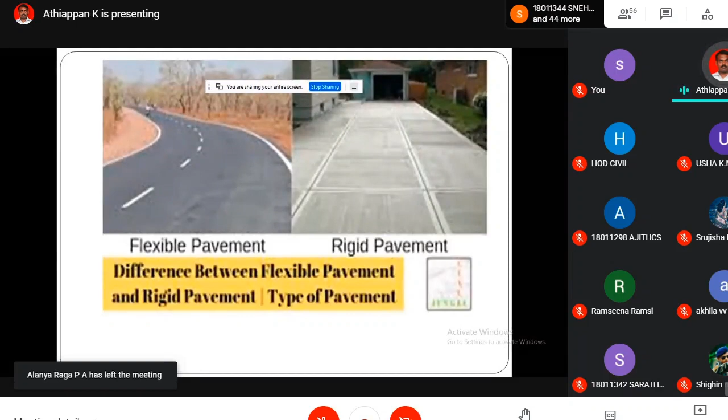Now, as far as loading is concerned, in flexible pavement the load transfer mechanism is from grain to grain - from one soil particle to another soil particle, the load will distribute. Whereas in rigid pavement, it acts as a slab or rigid plate, like a concrete slab. So please understand the components.

First you should have an idea about the components. That is the subgrade. In flexible pavement, the bottommost layer is subgrade, then we have the subbase course, base course, and surface course. Whereas in rigid pavement, here also we have the subgrade, then subbase course, then base course, and surface course.

You should have this basic knowledge of the components of the pavement.

Just like a building has substructures and superstructures such as beams, columns, and slabs, the pavement also has different layers. You should not think that the blacktop portion or the concrete surface we see is the only pavement structure - it has so many layers like buildings, the layers that I have discussed here.

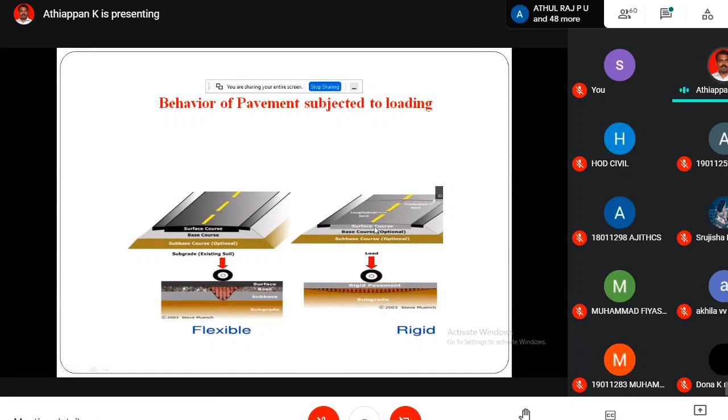You may ask about the comparison of ordinary concrete and pavement quality concrete. As far as rigid pavement is concerned, the topmost layer we are laying is the surface course, which is a concrete layer, a mixture of coarse aggregate, fine aggregate, binder content and water.

This is the components of the material we use in concrete. We know that concrete is a mixture of coarse aggregate, fine aggregate, water and the binder content, that is cement. Nowadays we are using geopolymer as a binder content in developing countries.

You may ask, what is the difference between ordinary building concrete and road concrete, that is the concrete used in the construction of pavement? Ordinary concrete is nothing but a brittle material. It is weak in tension, strong in compression.

We all know this, so in order to overcome the less tensile strength, we are introducing steel reinforcement. With the presence of steel reinforcement, the concrete can withstand the tensile stress or flexural strength and the compressive strength. This is the main thing.

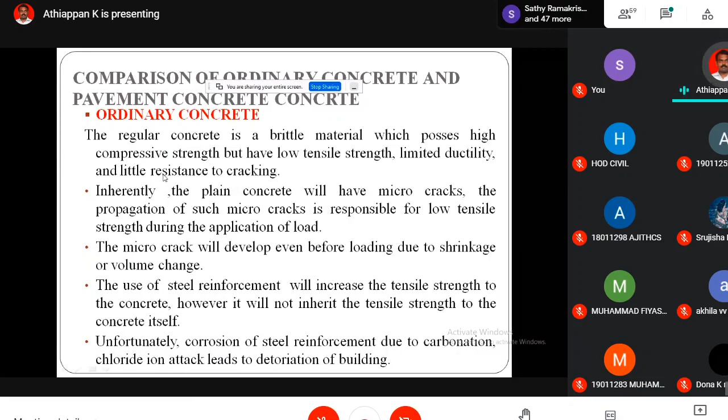In order to avoid corrosion of the steel reinforcement provided in ordinary concrete, we are providing a thick concrete cover, 20 mm, 40 mm, depending upon the exposure condition of the structure. This is the general detail about the ordinary concrete used in buildings.

The broad classification depending upon its parameters is that in ordinary concrete we need two parameters, that is compression as well as flexural strength. The main important factor required is compressive stress; it should be able to withstand the compressive stress and the flexural strength.

So normally when a beam is loaded, what will happen? The beam is subjected to bending, it is subjected to shear, it is subjected to compression and torsion.

So in order to withstand that load, the concrete should have enough strength, some M20 grade, that is 20 Newton per mm square after 28 days of curing. So flexural strength, depending upon the flexural stress created due to the loading condition and the span of the beam, that flexural strength will be recorded. So depending upon that, we will provide the reinforcement.

So this is the general requirement of the ordinary concrete which is used in building construction. The concrete should possess a high compressive strength as well as flexural strength. So these two parameters are important factors.

Whereas in case of pavement quality concrete, that is the concrete used for construction of road pavements, it should require compressive strength, which is also very important. But when compared to compressive strength, the other parameter is very important, that is the flexural strength. What is flexural strength? It is resistance to bending, so that strength we call flexural strength.

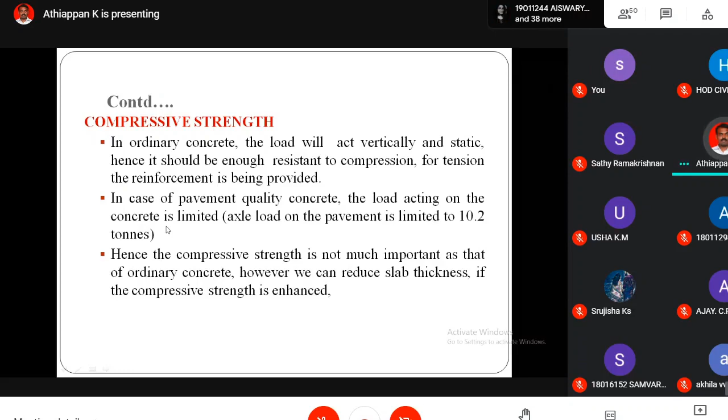Yes madam, so normally, as the load carrying capacity of the vehicle increases, we will automatically increase the axles, like tandem axle, tridem axle. For your understanding, for every 10.2 ton increase in vehicle load, they will add one axle. We have standards like tandem axle and tridem axle depending upon the capacity of the vehicle. Anyhow, the load distributed at the point of contact between two wheels on a single axle will not exceed 10.2 ton.

Next, flexural strength. As the pavement is a rigid plate, when a wheel load is moving on the top surface, the plate will tend to bend. The concrete surface, the slabs will tend to bend. Because of this, the concrete used in the construction of the road should have enough resistance to bending action. So flexural resistance is very important.

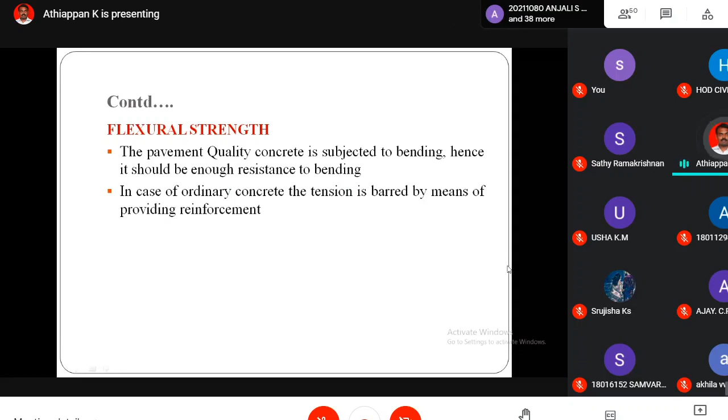Next one is energy absorption. As I told you, according to Newton's third law, for every action there is an equal and opposite reaction. So when a load is put on the road surface, it will be reflected to the vehicle. If it is reflecting completely, then the vehicle will get damaged soon and we will feel discomfort.

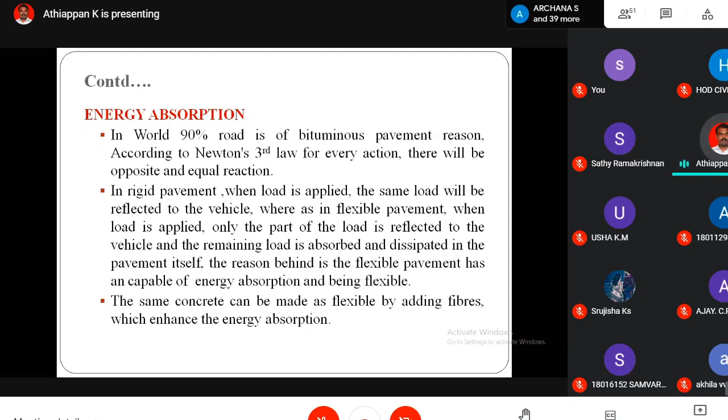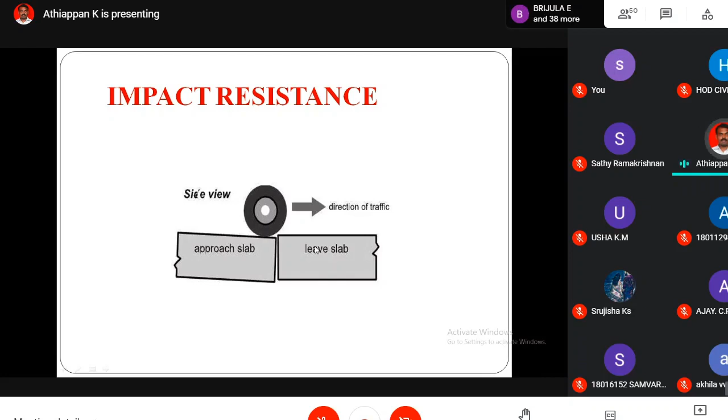So in order to avoid such conditions, the pavement should have good energy absorption and impact resistance. In order to accommodate expansion and contraction, we have to provide joints. As a result, when a wheel moves from one slab to another, impact action takes place at the edge of the slab. So the concrete used for pavement construction should have enough resistance to withstand the impact load.

Next, fatigue resistance. What is fatigue resistance? Normally in an ordinary building, we fix the load, say 1000 kilonewton, 2000 kilonewton, 20 or 80 kilonewton, whatever it may be, and based upon that we provide the section and reinforcement. As far as road pavement is concerned, the axle load is limited to 10.2 ton. Because of the repeated passing of this 10.2 ton axle, the pavement will fail. That is fatigue failure, nothing but failure due to repeated application of load.

I will give one example. You take a coconut with shell, and you hit it with a 5 mm rod. Whether the coconut shell will break or not, how many number of hits is needed to break that shell? Anyone?

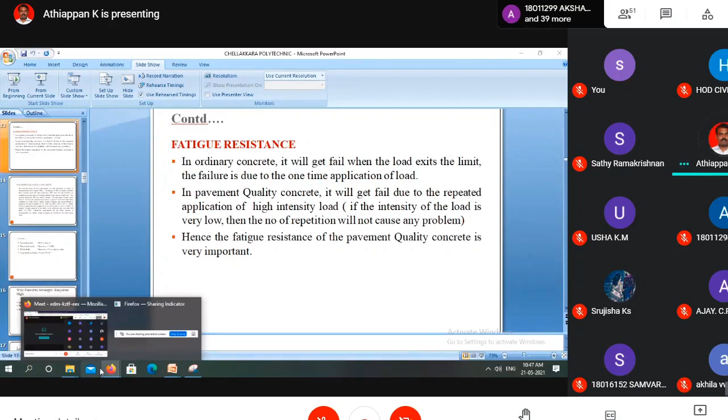Dear students, you take a coconut with a shell. If you are hitting with a 10 mm rod, how many number of strikes is needed approximately to break the shell of the coconut? Please, anyone?

Three or four is enough. With a 10 mm rod, you can break the shell with 3 or 4 hits.

Okay, then I will reduce the size of the rod further. For example, you are given only a 2 mm steel rod, and asked to hit the coconut with shell to remove the shell. How many number of blows does it require? I am telling only a 2 mm rod, which you can assume is like a needle. How many number of blows does it require? Please tell me. Please be interactive, then only I can keep the class alive.

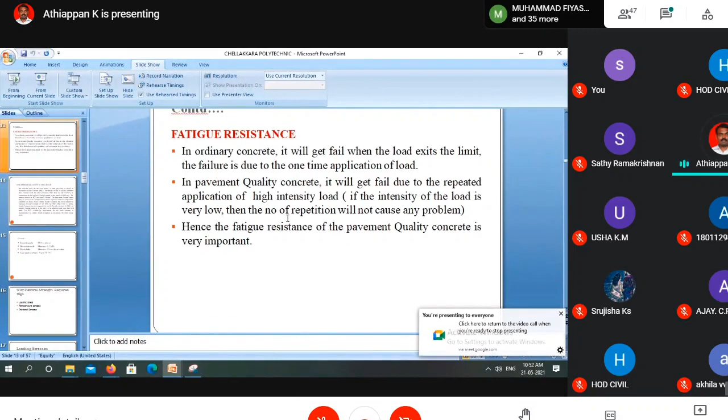So that is fatigue failure. The concrete we are using should be able to withstand fatigue resistance. Now we will come to pavement quality concrete.

So here we have many questions regarding pavement quality concrete. As far as the concrete used for construction of the road pavement is concerned, they use the minimum grade of M40 concrete. Why are they using M40 grade, and not M20 or M30? As per the IRC code, IRC 15 of 2011, we have the minimum grade of concrete recommended for construction of the pavement as M40 grade.

What would be the reason we are not using lower grade concretes? Do you have any idea? I will tell you, as I already mentioned. The concrete is subject to so much flexural stress and tensile stress because of the bending action due to the wheel load, and due to temperature stress, the slab will tend to warp.

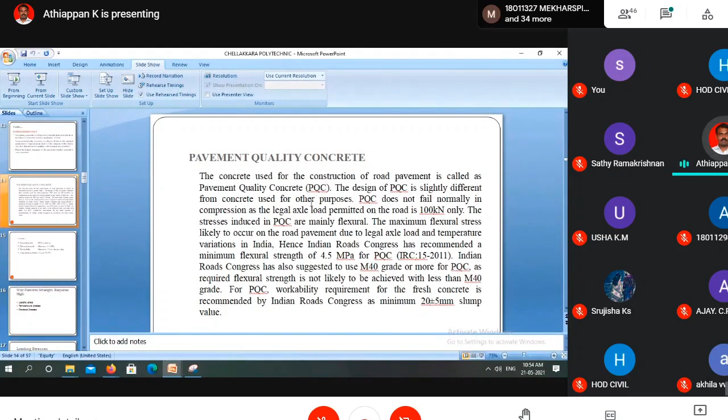The slab will tend to warp. Let me show you. This is the loading condition. The wheel may be in this position, or this position, or this position. Because of this load, the slab will tend to bend.

Due to temperature, in the daytime the top face of the pavement has very high temperature while the lower face has less temperature. Because of this, the top portion expands and the bottom portion contracts, causing bottom-up warping. During the night time, the top face temperature becomes very low compared to the bottom of the slab, so as a result, the slab will warp in the opposite manner.

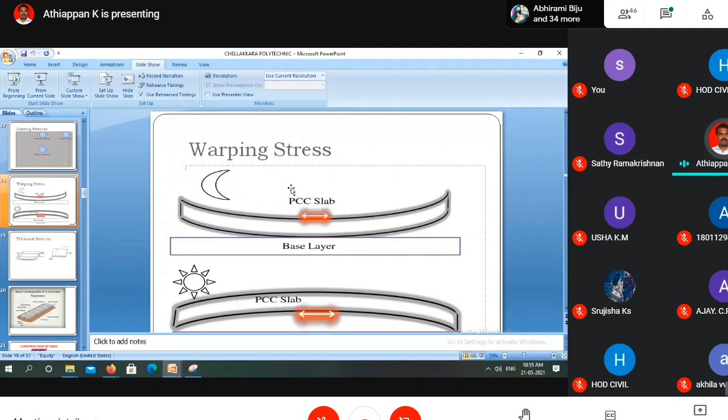Because of this, we get warping stress, and because of the loading, the slab will tend to bend. These stresses mean the concrete slab has to withstand this bending action, so for this we need a minimum grade of M40 concrete. Why do we say M40, when only flexural strength is needed as the slab is subject to bending? But we are saying M40 grade concrete is needed, meaning the compressive strength should also be high.

Why are you asking this question? The reason is that even though concrete is strong in compression and weak in tension, it also has some flexural strength. So what is the tensile strength?

Tensile stress in concrete is 0.7 square root of FCK. So the flexural strength of concrete, or tensile strength, is equal to 0.7 square root of FCK, where FCK means compressive strength of the concrete. So if you put FCK as 40, what is the flexural strength? Please tell me, as per IS 456:2000 code.

The flexural strength of plain concrete is equal to 0.7 square root of FCK. FCK means characteristic compressive strength of the concrete. So you put FCK equal to 40. What is the flexural strength, you tell?

So according to IS 456, plain cement concrete also will have flexural strength. The formula is 0.7 square root of FCK. So in place of FCK, you put 40. You are using M40 grade. IRC has recommended that only concrete of grade greater than or equal to M40 should be used, and I will tell you the reason.

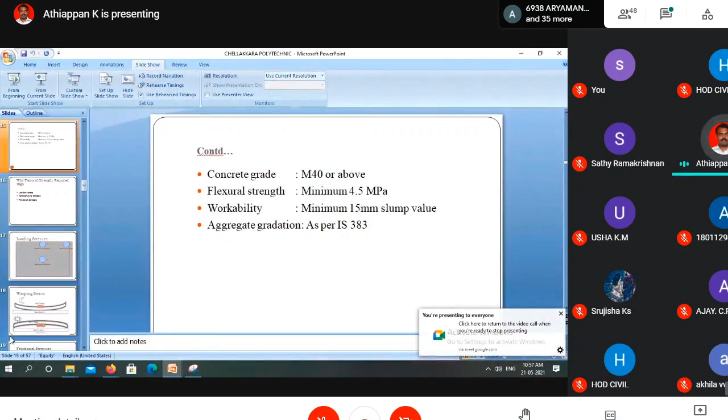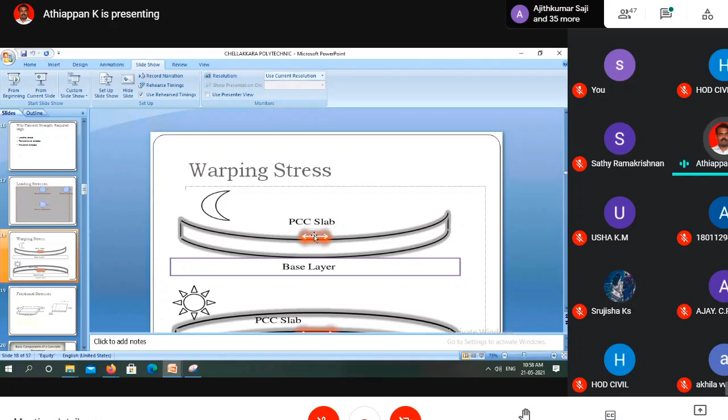The reason is that, because of the bending action due to wheel load and due to temperature stress, bending action takes place. So the total flexural stress created on the slab will be less than 4.5 Newton per mm square, that is 4.5 megapascal.

So if you are providing M40 grade concrete, then the plain cement concrete itself can withstand a flexural strength of 4.5 megapascal. So by using M40 grade concrete, even plain cement concrete satisfies the required minimum flexural strength of 4.5 Newton per mm square.

This is the maximum stress induced on the pavement surface due to wheel load and temperature stresses from warping or frictional stress. That is the reason they use M40 grade, as we are not using any reinforcement to enhance the flexural strength of the concrete. So we are only using plain cement concrete, always keep this in mind.

We are not providing reinforcement to enhance flexural strength. Just from the plain cement concrete itself, we are having some flexural strength, which will withstand the bending action due to warping or wheel load. That is the reason we recommend M40 grade concrete, so that we can achieve the required flexural strength of 4.5 Newton per mm square.

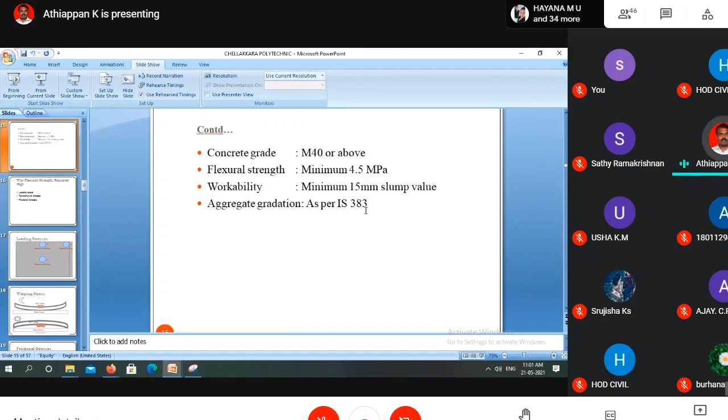Another stress created on the rigid pavement is that the whole slab is resting on some surface. If the slab is expanding, what will happen? At the contact of the slab and the surface, an opposite force, the frictional resistance, will be created in the opposite direction. Because of this, stress will be created at the bottom of the slab.

That stress is called frictional stress. Here the frictional stress is compressive. Whereas when the slab is contracting, when the temperature is very low, it will lead to the formation of frictional stress at the bottom face only, that is at the point of contact of the surface and the concrete slab.

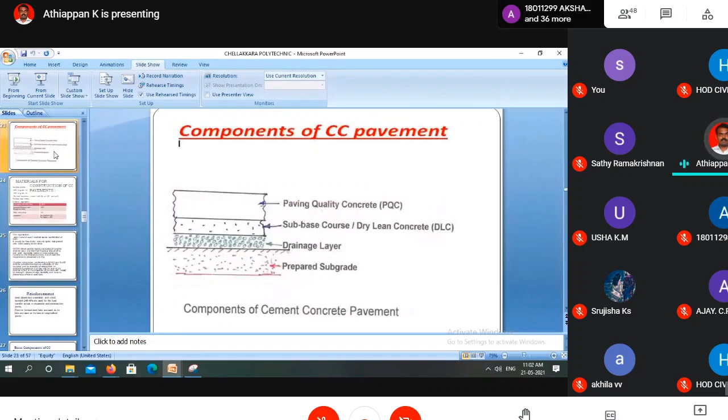Now we will move on to the construction of the rigid pavement. Before that, I will explain the components of the CC pavement, and in the rigid pavement itself, where the rigid pavement is needed.

In places of heavy rainfall, we have the option of flexible pavement, which has less construction cost. Then why should we go for rigid pavement? This rigid pavement is applicable in places having heavy rainfall, poor soil condition, poor drainage, extreme climate conditions, or a combination of these conditions. In such cases we have to go for rigid pavement construction.

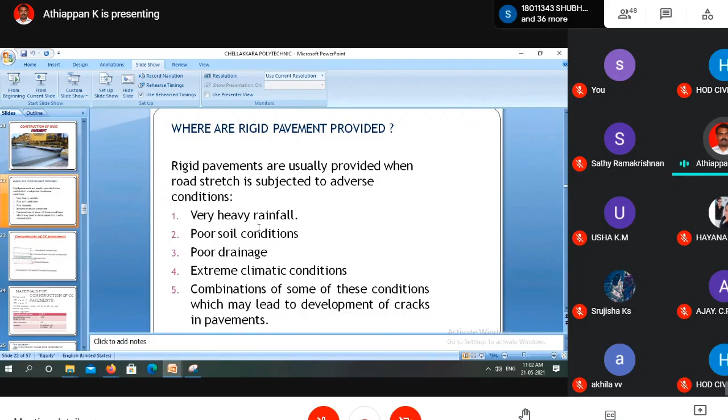The major component is the subgrade. This is the bottommost layer of the pavement. As in the flexible pavement, the madam will explain about this subgrade. So here also, the bottommost layer is the subgrade only.

If the subgrade layer has enough strength, then the top layer required is very less. If the subgrade strength is poor, then the layer constructed above the subgrade needs to be higher. So the subgrade is one important factor which determines the thickness of the overlying layer. This is the subgrade, the platform for the construction of the upper layers.

Sometimes it may be at the cutting portion, or sometimes it will come under the filling portion. Sometimes the natural ground level may be adopted as the subgrade. According to the new code, in flexible pavement the minimum CBR value required is 5%. If the CBR value is less than 5%, we have to remove the soil for a depth of 0.5 meter and bring borrowed soil having a high CBR value, say 8 or 10.

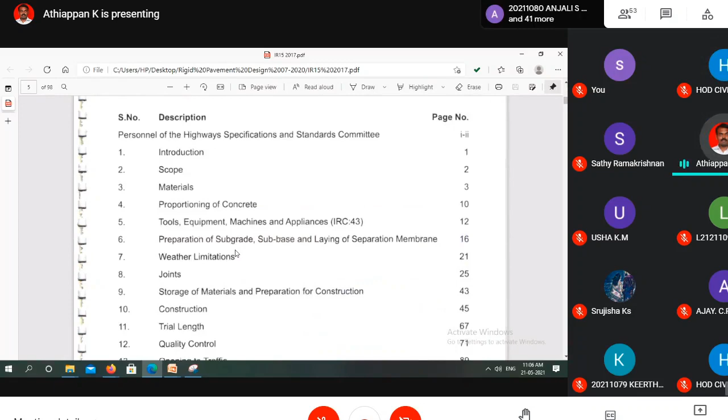Are you able to see the code, yes students? Are you able to see this code? Please students, reply through your voice. Yes sir. Okay, okay.

So for the construction of the pavement, we have to use... please understand, students, as you are studying the books. So please, as you are a UG student, nowadays you are following the books.

It is written by some faculties like me, or your HOD, or some other faculties or persons. As the technology is upgraded, it's only reflected in the codes. For example, if you follow the Khanna and Justo book, it is written 10 or 20 years back, so it may be outdated. For real-time application, each and every civil engineer in the field or any place will use only the current codes as reference.

Whether a design engineer or architect, whoever it may be, they will follow the standards as per the government procedure. So every year or every 5 years, they will modify the code. So please understand, students, you should follow the code if you are coming to real-time application. For a crisp knowledge and to understand things easier, we are following the books, your faculties are suggesting the books, but as far as real-time application, you have to follow only the code.

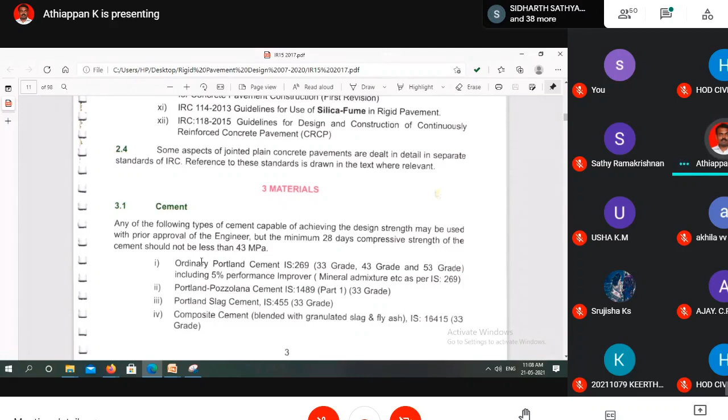We can use cement, that is ordinary Portland cement, 43 grade, 53 grade or 33 grade. Any of the cement can be used, but the concrete should attain the strength of M40 grade concrete. We can also use other cements like composite cement, Portland cement, and any other cement, with the inclusion of 5% of admixtures.

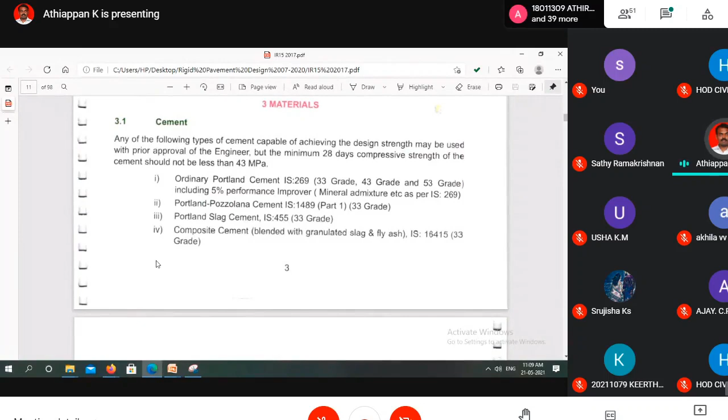This is the chemical admixture. Admixture means nothing but a chemical which is added with the concrete. For example, a concrete will be manufactured at one place and it has to come to the construction site of the pavement. In such case, you have to delay the setting time, so we will use retarders. Likewise, many chemicals we may need to use.

So you can see the code, that is IS 9103. In that they will provide the detail about the admixtures. Normally we will use initial setting time; to delay the setting time, we will use retarders, then air entraining agents. So many admixtures we are having, and those admixtures we will use, but that should not exceed greater than 2% of the cement. That is the main thing.

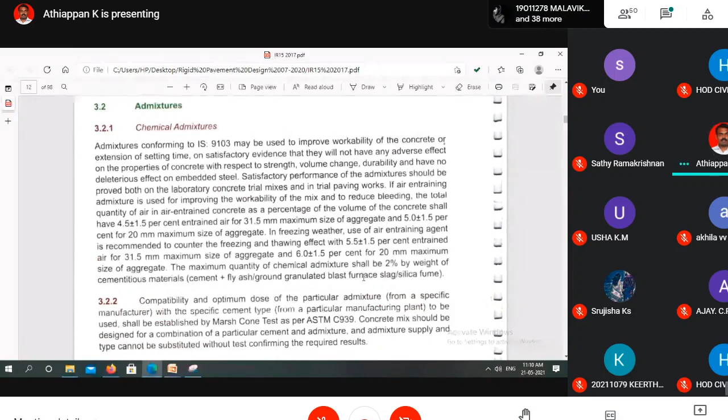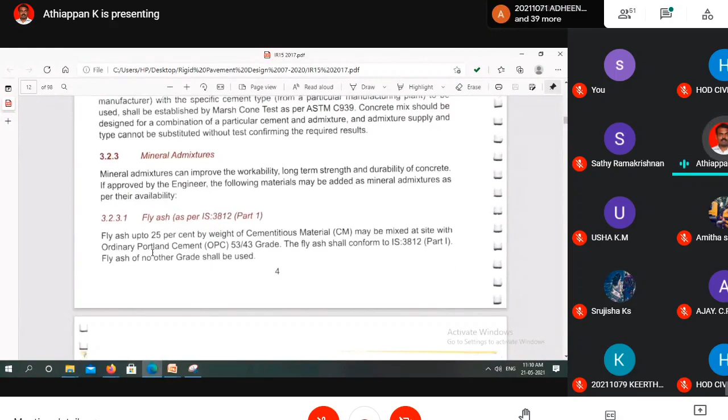The maximum size of aggregate used in the concrete is 31.5 mm. Fly ash can be used up to 25%. GGBS blast furnace slag can be replaced up to 50%. Silica fume can be replaced up to 10%.

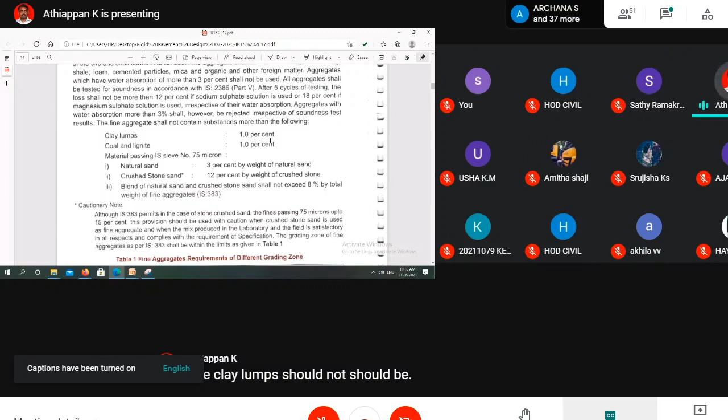Metakaolin, a type of clay content, can be added up to 700 to 900 square meters per kg. This is for the aggregate used in the construction of the concrete. Clay lumps should be less than 1%, and coal and lignite should be less than 1%.

For the 75 micron sieve passing, natural sand should not be greater than 3%. In case of crushed stone, it should not be greater than 12%. If using blended material, it should not exceed 8%.

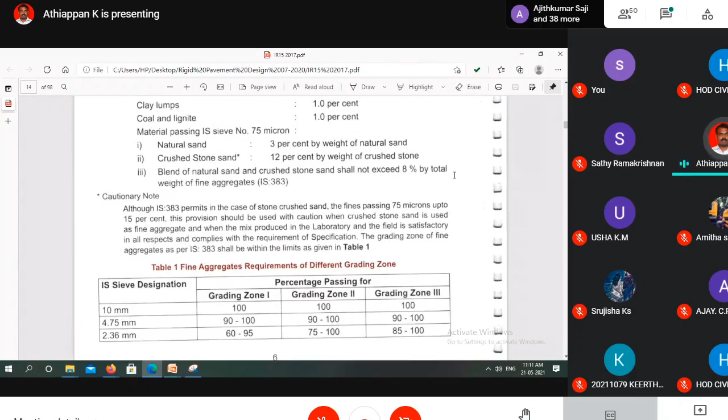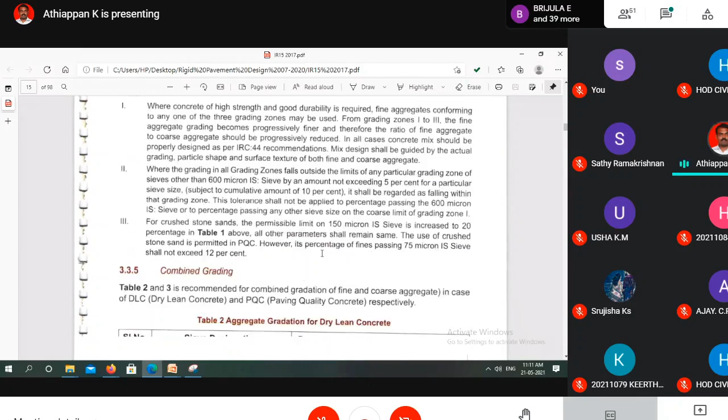This is the fine aggregate used for the concrete, and it should satisfy any one of these zones. This is the gradation particle size distribution requirement for construction of dry lean concrete. If using dry lean concrete, the aggregate should satisfy this requirement.

For particle size distribution, in the 26.5 mm sieve, it should pass 100%. Then in the 19 mm sieve, the particles should pass 75 to 95%. This is the requirement.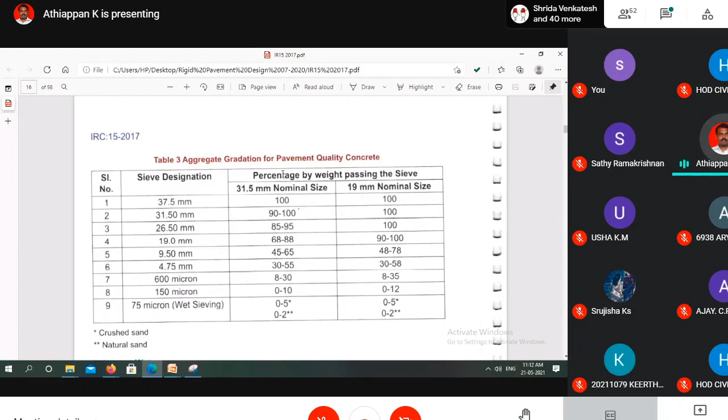The aggregate used should satisfy any one of these gradations, otherwise it cannot be used for pavement construction. Then water, dowel bar, all those things are explained here, along with filler and joint sealing requirements.

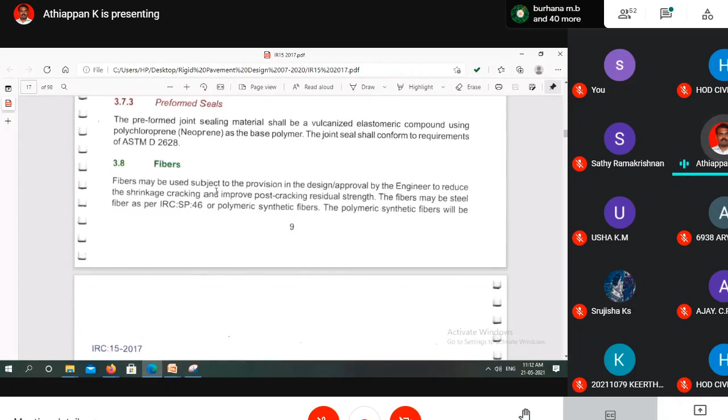Nowadays fibers are also used. Normally fibers of 8 to 300 micron are used, with length from 6 to 18 mm. Specific gravity and other properties are given.

Fibers are used because in extreme climatic conditions, like very hot temperatures followed by very cold temperatures, such as in Rajasthan, more shrinkage and expansion takes place, resulting in more warping stress. If these fibers are provided, they impart extra tensile force or flexural strength, so the pavement can last for a longer period.

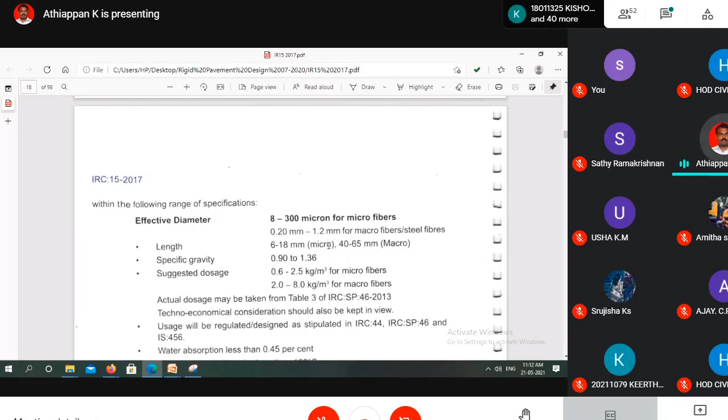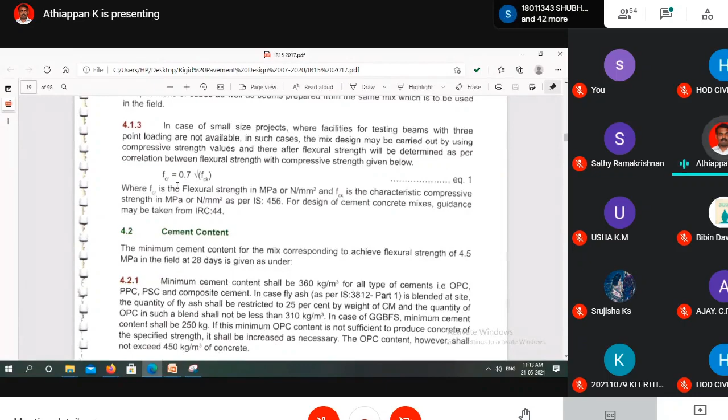As I told you, flexural strength equals 0.7 times the square root of FCK. The maximum cement content allowed is 450 kg; beyond 450 kg, cement should not be used.

The minimum cement content is 360 kg in case of OPC, PPC and PSC. In case of GGBS, the minimum cement content is 250 kg per cubic meter.

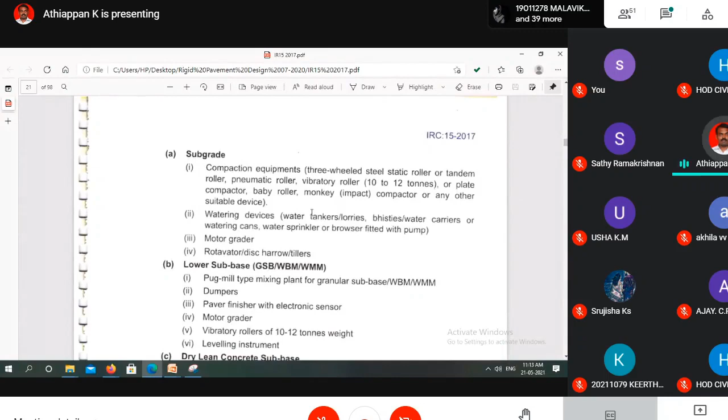For subgrade preparation, these are the equipments needed for construction of the pavement, including compacting equipment, water devices, water cans, motor grader, pug mill, and dumpers, which I will explain.

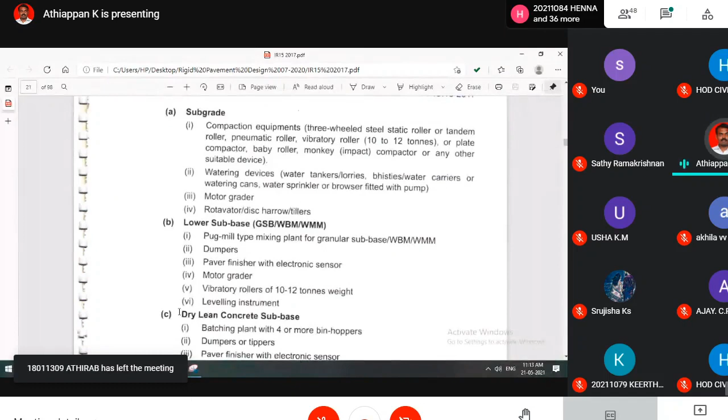This is the subgrade. In order to prepare this subgrade well, you have to loosen the soil. I will now explain how to construct it.

First, you have to loosen the soil, whether it is good soil, bad soil, or borrowed soil, whatever it may be. You take a sample and go to the laboratory, where you determine the density of the soil.

You have to increase the water content. Starting from the initial water content, you compact the soil without water content first and find out the density, then increase the water content by 2%, 4%, 6%, 8%, 10%, 12%, 14%, and so on.

As the water increases, the density also increases. At a particular point, the density falls down. The reason is that initially the water facilitates compaction, but beyond a certain limit, the water content will occupy the voids and reduce the density, leading to bleeding. So we have to find out the moisture content at which the density is maximum. That is called the maximum dry density.

For example, 2.16 gram per cc is obtained in the laboratory. So of that 2.16 gram per cc, you have to achieve a density of 98% in the field. Otherwise, with further application of the wheel load, when the vehicle moves, it will consolidate and compact further, and settlement will occur. This settlement will be reflected on the upper layers also.

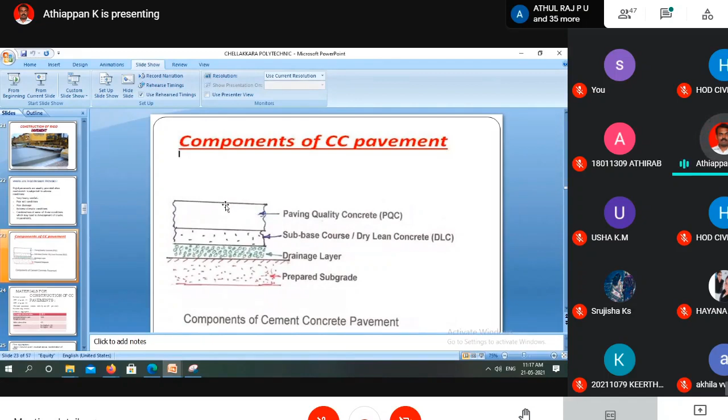So you may ask why we won't provide any joints in the subbase layer. We don't need to provide joints in the dry lean concrete because it is a 1:4:8 concrete with high voids. Those voids will accommodate the expansion and contraction. So you have to make this pavement quality layer, the PQC, as an independent layer.

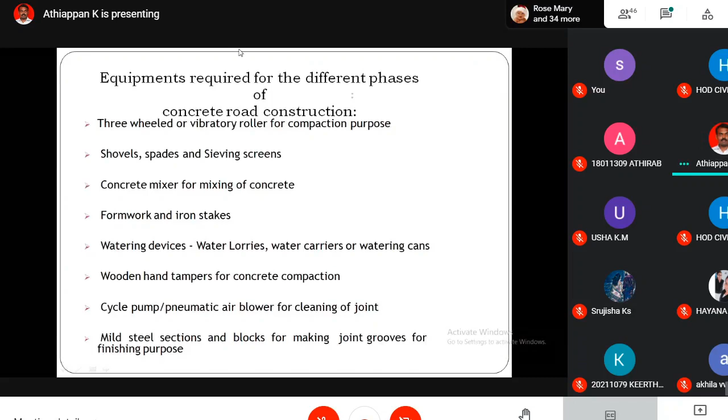Please see here, normally the slab is... this is the bottommost layer, subgrade, then this is a drainage layer, then this is the concrete pavement. In case the subgrade is poor, we have to provide dry lean concrete. The topmost layer we are constructing as a slab only. Normally the slab size should not exceed 4.5 meters.

For example, why are they laying it as 2 strips in the longitudinal direction? Suppose the pavement is 7 meters wide. I have already told you that the width or length of the slab should not exceed 4.5 meters. If you put 7 meters like this, it cannot accommodate the expansion and contraction, it will lead to cracking. So to avoid this, we divide this 7 meters into 3.5 meters and 3.5 meters, with the length maybe 4.5 meters. This joint we call the transverse joint or contraction joint. And the joints in the longitudinal direction we call...

So in this transverse joint itself we will have the expansion joint also. Don't confuse the contraction joint and the expansion joint, I will explain later. So this is longitudinal joint, this is transverse joint. In the transverse joint itself we have two types: one is contraction joint, another is expansion joint.

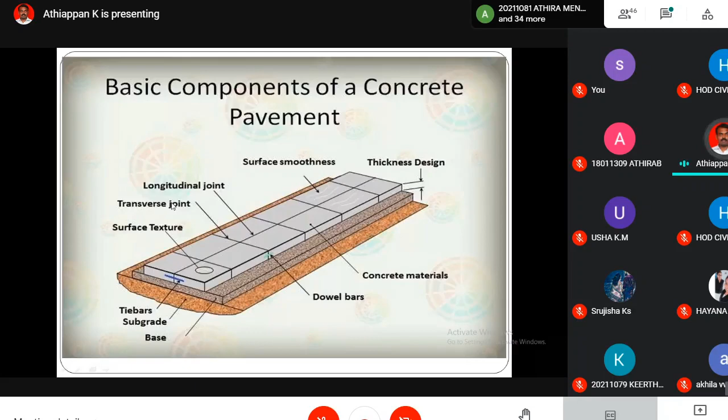So this is how you lay the pavement as a slab. In between the joints there will be a gap, that is the joint width, maybe 2 to 3 mm. This is the compacted layer of the subgrade, over which they provide the GSB, then over which they provide the dry lean concrete.

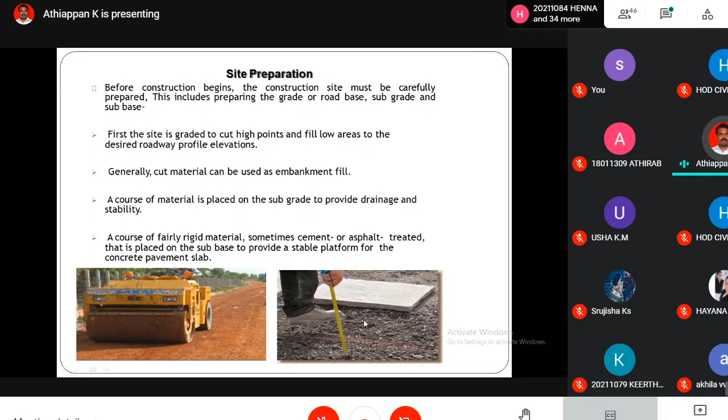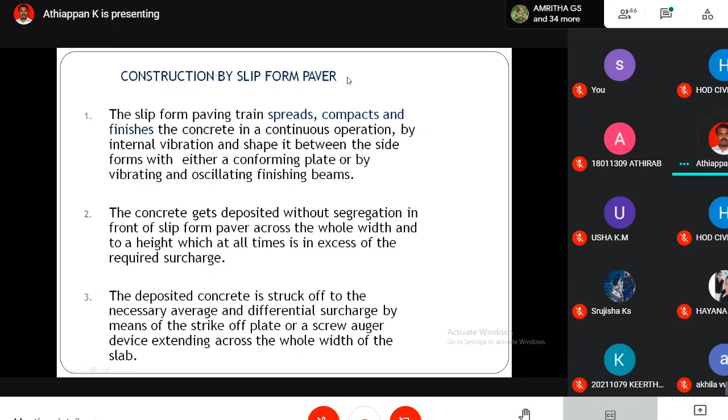So what we have to do is construct the pavement in two ways. We are constructing this rigid pavement by two methods: one is by means of slip form method, another is by means of fixed form method. I will explain that one by one, but before that, I will explain the joints.

So here, the expansion joint or contraction joint will be in this place, and this is the longitudinal joint. The function of this is that in the contraction joint and the expansion joint we provide the dowel bar. It will bear the load, keep the slab in the same level, and transfer the load between the slabs. That is the function of the dowel bar, to keep the slabs level.

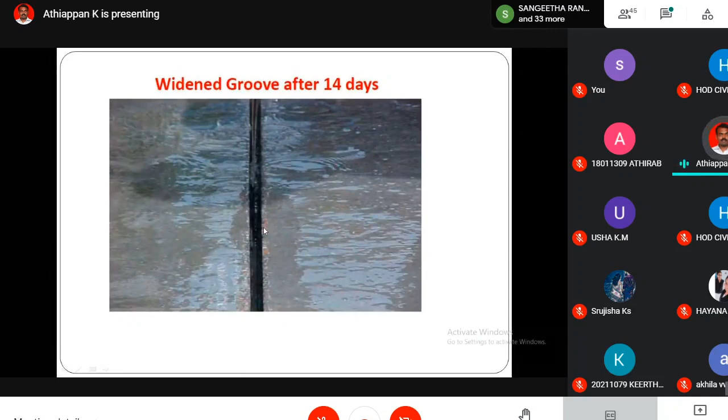So this is the finished, widened groove after 14 days for the final finish of the joint. So here, this is the contraction joint.

We provide the dowel bar at a distance of h by 2. On top we provide the rod, then a groove is cut out. In the groove we fill it with the filler and then seal it with sealant. So we call it the contraction joint. Nowadays we are using this type of joint only.

At the end of construction only we are providing the expansion joint. Please understand, student, at the end of construction only we provide the expansion joint. Otherwise, for every 4.5 meters we are providing only the contraction joint, that is enough. So this is contraction joint with the dowel bar, and in the tie bar also I will explain you.

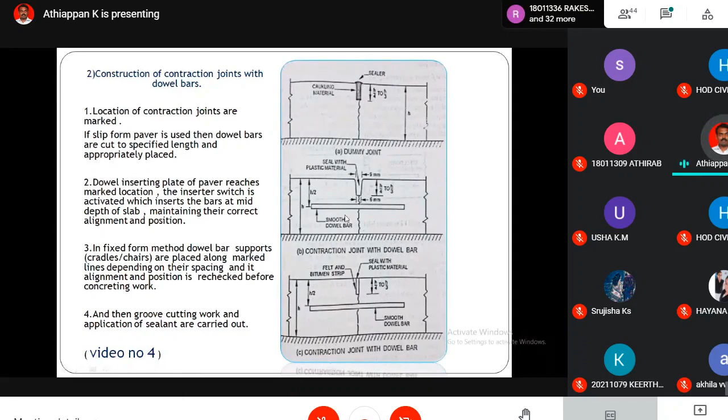So here, this is the expansion joint. At the end of construction, we finish it in such a way that this rod is fixed to the concrete, the other rod will be in this manner, for the next day's construction concrete. Here we use a plastic sheet, and there is an expansible gap so the rod can freely move in this direction. So when the slab is expanding, this rod will come here. That is called the dowel cap.

It will be around 7.5 centimeters, filled with compressible material. So when the slab expands, this will be compressing. When the slab contracts, the rod will come back to the original position. So on one end, the concrete slab can move over the rod.

Normally we use 25 mm diameter bar. The length of the dowel bar is 500 mm long, spaced at a distance of 250 mm center to center. But in design aspect it may change, so for general understanding I am saying this. Then the filler depth is around 25 mm, it may be plus or minus 3 mm.

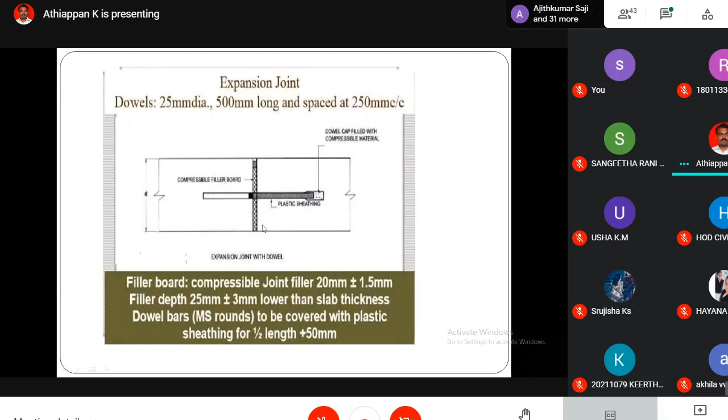So here this is the dowel bar, with dowel cap, and this is the expansion joint. At the end of the construction day, the next day they will start from here. What is the function of this dowel bar? If you are not providing it, the slab will settle down. As the wheel moves from one slab to another, this bar will bear the stress coming from the wheel, and another function is it will keep the slab in level.

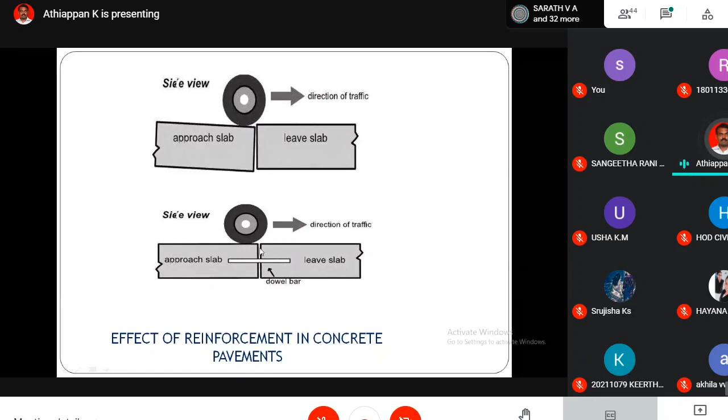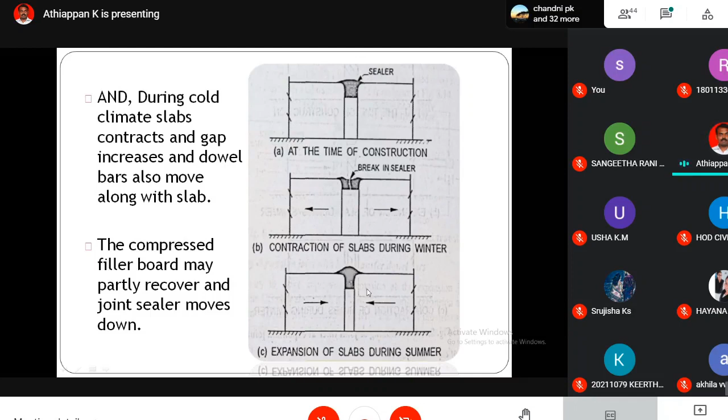See here, the sealer. At the time of construction, it will be like this. When the slab is expanding, the sealer will reorient itself, and when the slab is compressing due to expansion, the sealant will come to the top. So here it is filled by filler material.

Then after construction of the pavement, in the fresh concrete time itself, you have to scrub it with the wire brush to have enough texture. There are two types of construction: slip form construction, and fixed construction. So by this we can able to see.

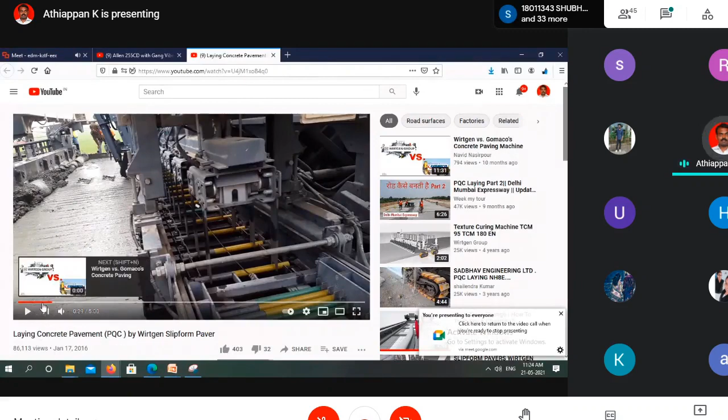See here, this is the DLC layer over which the sheet will be placed. I have already told you now.

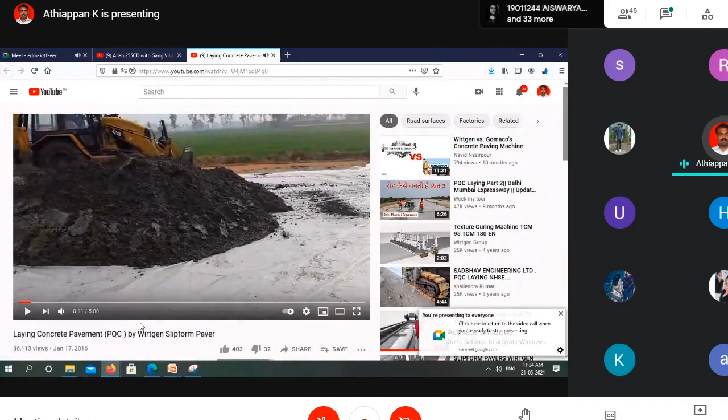See here, I have told you that this is over the dry lean concrete. We will provide the polythene sheet, that is the geosynthetic sheet. What is the reason? The concrete slab constructed over the sheet is free to move over the surface; otherwise, frictional stress will be created at the bottom of the concrete, and it will create some problem or create cracks. So in order to avoid this, we are providing these sheets.

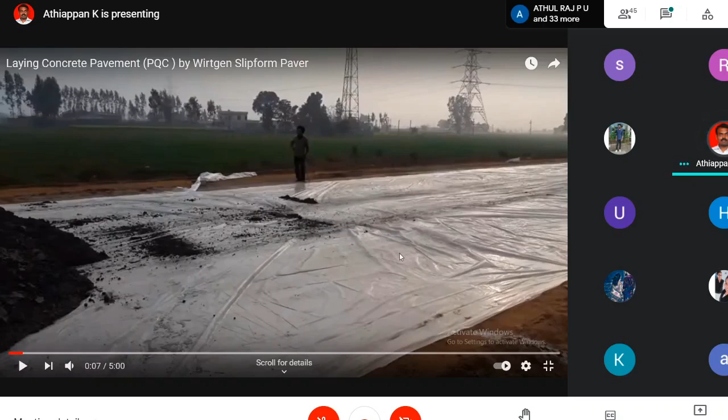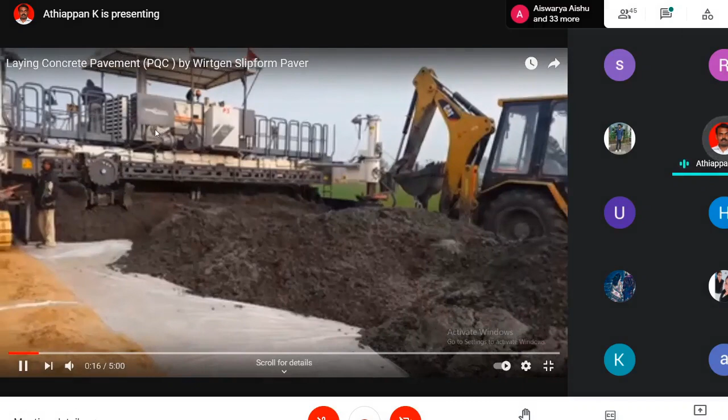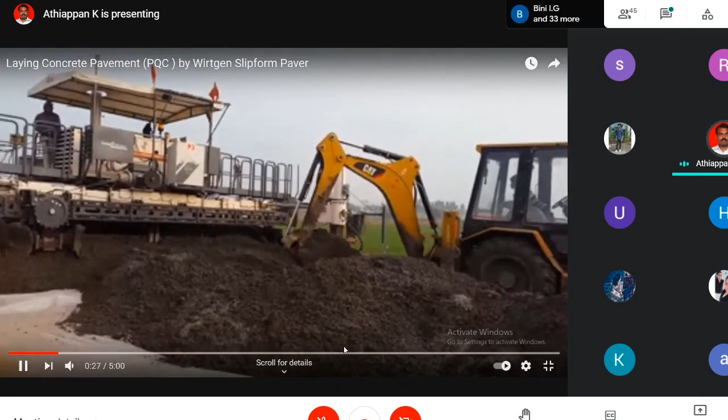See here, the concrete of M40 grade is brought to this equipment. So see this video, this is the paver machine, the slip form paver machine. In the current industry, in 2020-21, this methodology we are using. The M40 grade concrete, manufactured in the batching plant, is taken to this site and placed on one side. Okay, other side, please slowly.

Now the concrete is leveled to maintain the required depth. The thickness of the slab is determined in the design aspect depending upon the wheel movement, axle load, and climatic conditions - all those things decide the thickness. So here the concrete is brought and roughly leveled.

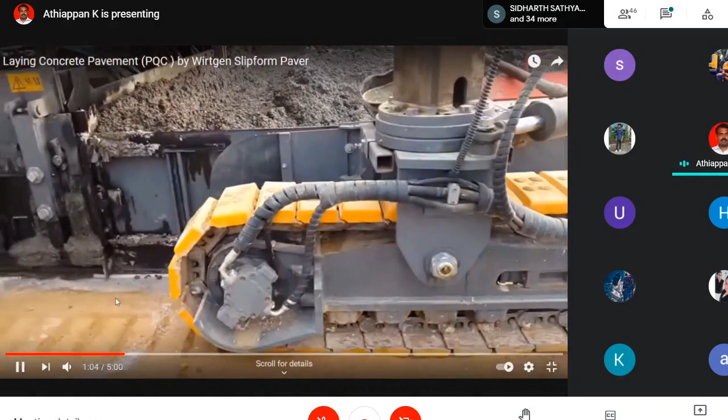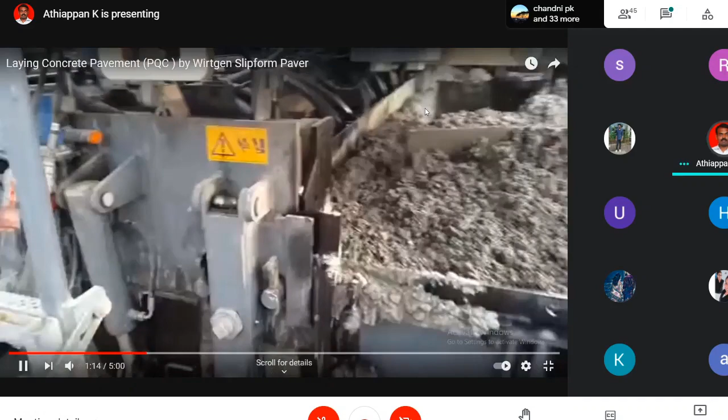So this is the paver machine. In the paver machine itself, see here, you can fix the thickness - how much thickness you need can be fixed. Then the camber, that slope, can also be maintained here. It is automatic, so if you want 2.5% slope or 1.5% slope of camber, that we can maintain.

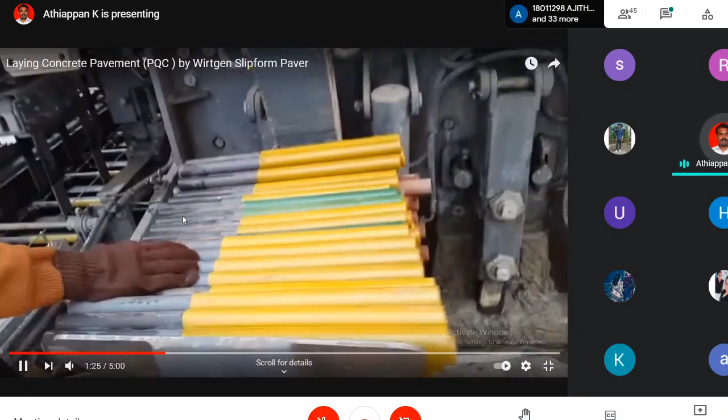See here, I told you earlier we will fix the dowel bar and pour the concrete. Now they are laying the concrete and placing the dowel bar. One side is provided with plastic sheathing so that the slab can move on that side. See here, the concrete is compacted and vibrated for the required thickness.

Okay, this is the dowel bar. For every 4.5 meter they will place it - it is not an expansion joint, it is a contraction joint for every 4.5 meter. Now the plain concrete is only compacted - the concrete is placed, vibrated, compacted, then this dowel bar is placed for every 4.5 meter.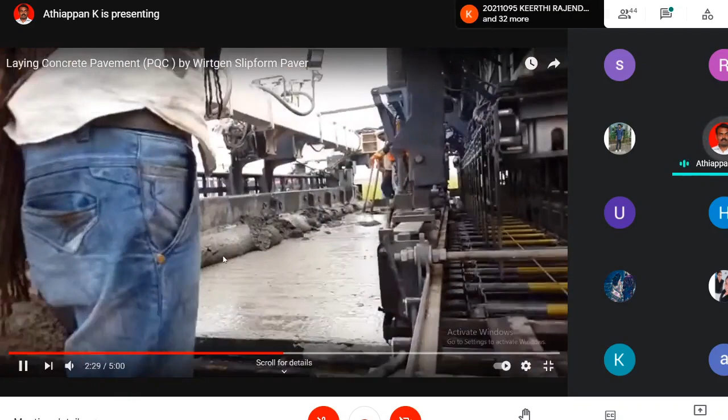So in the machine they are automatically fixing this dowel bar. Earlier we had to fix it manually, which was very difficult and caused many errors. But nowadays it is not the case. Please watch it keenly.

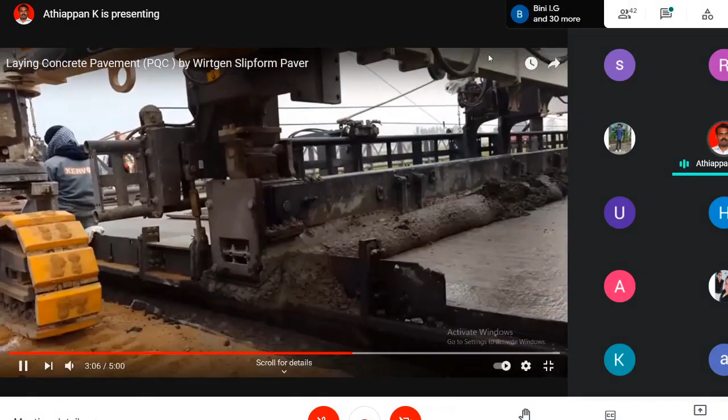So this is the dowel bar. The pavement quality concrete is laid, then this dowel bar is inserted automatically. This is the slip form - this paver will move at a rate of 1.5 meter per minute, only 1.5 meter per minute. See here, this form is moving in the backward direction as the concrete is laid and compacted, then the form is moved slowly backward. So that is slip form.

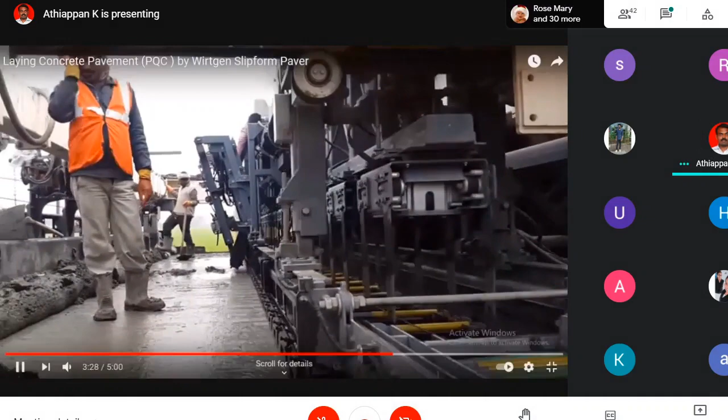Are you able to see this? As you are laying, the form will move in the backward direction. See here, otherwise we would have to mold it manually, which is very difficult. See here how this dowel bar is inserted. So this is the slip form method of rigid pavement construction.

Please, you watch it.

The spacing is given according to the length of the rod, as set in the machine. Then it is placed inside. See here.

The dowel bar is pressed inside the fresh concrete, for every 4.5 meters. That is the contraction joint.

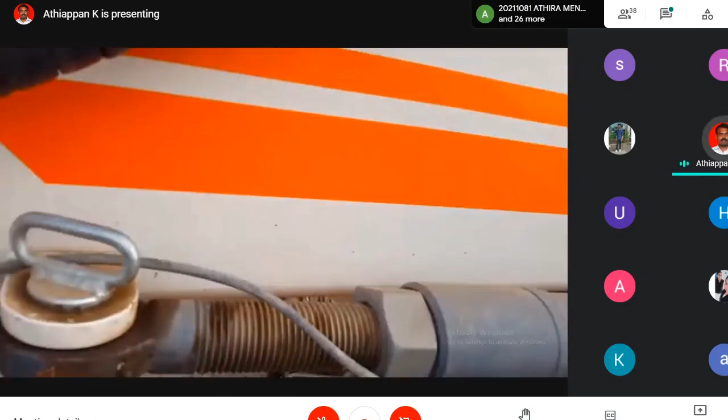Next day, what they will do is the concrete will undergo initial setting, then we will cut over the center of the dowel bar. See here, so we are having the finishing, the smooth finishing.

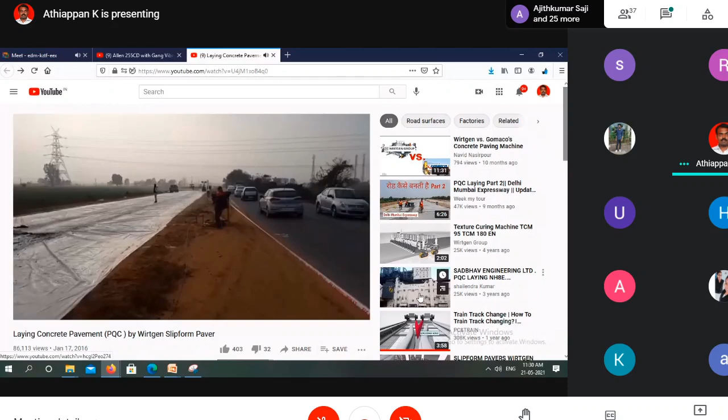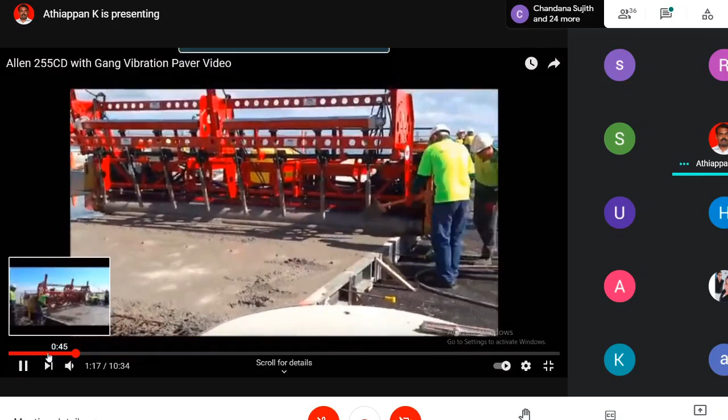Next, this is the manual method of construction. See here, we have to prepare the mold like this. It is not the slip form method, so we are preparing the mold according to the width.

Here the concrete is poured, and by means of a needle vibrator it is vibrated. See here, it is a fixed form method. The manual labor required is more, but there you don't need much labor.

The machine will do everything automatically. But here the concrete is compacted by means of this vibratory roller. But the form is not slip form, it is fixed form.

See here, and the dowel bar and all those things you have to fix manually. It is very difficult, and there is a chance for more errors also.

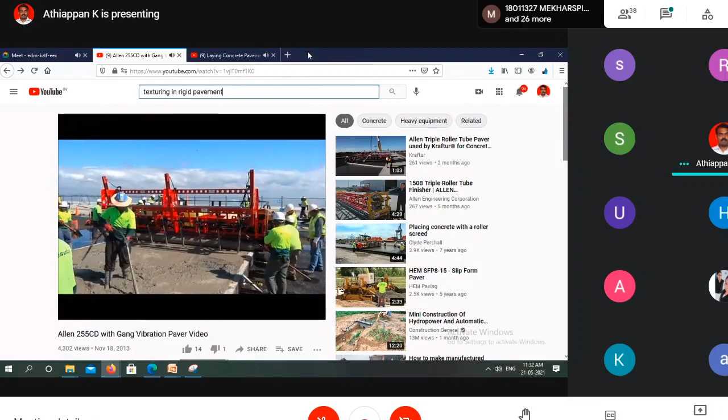See here, so the finished concrete surface will be smooth like this, but we need a rough texture.

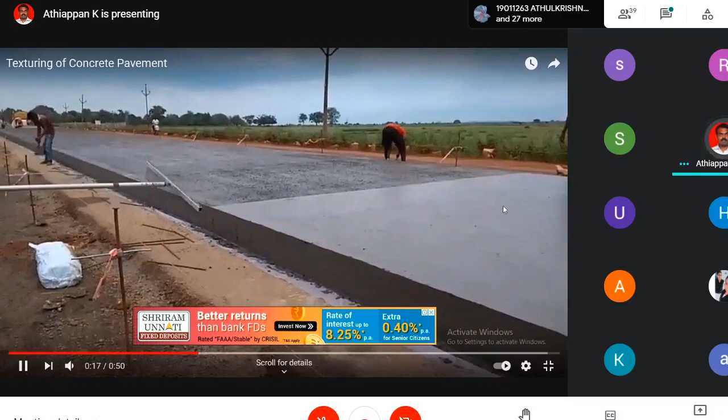So see here, here it is the wire brush. With the wire brush they will create some groove, cutting it while the concrete is still in the fresh stage.

After the concrete is hardened, it becomes difficult. So here they are creating some rough texture, so there will be a groove, giving good friction between the concrete and the tire surface. That's texturing.

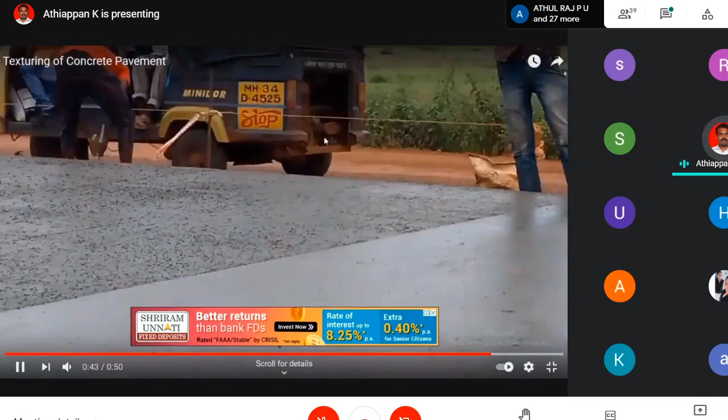Next day, what they will do is note where the dowel bar is placed, then cut up to the depth of the dowel bar along that distance.

Then they will fill it with filler, and then complete it with sealants.